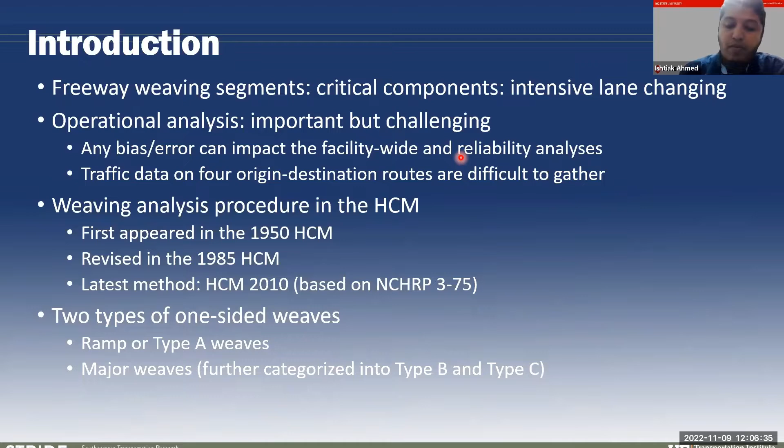A bit more background: this project was mainly motivated by some limitations that came to light recently about the HCM weaving segment analysis method. The HCM method for estimating speed and capacity of weaving segments depends on several steps, and each step has different models, like separate models for lane change prediction and separate models for weaving and non-weaving speed. Different and separate models mean more chances of uncertainty and modeling error, so the process was overall a bit complex.

Recently, it was found that the HCM estimated speed is not sensitive enough to different critical parameters, such as segment length, and there is also a tendency of overestimating the density. The HCM method often predicts the weaving segment speed to be higher than the non-weaving vehicle speed, which is counterintuitive since one would assume non-weaving speed would be higher because they're not involved with much lane-changing maneuvers compared to weaving vehicles. Also, when estimating capacity, the flow rate at capacity does not follow the fundamental traffic flow relationship of speed and density. So that is another issue.

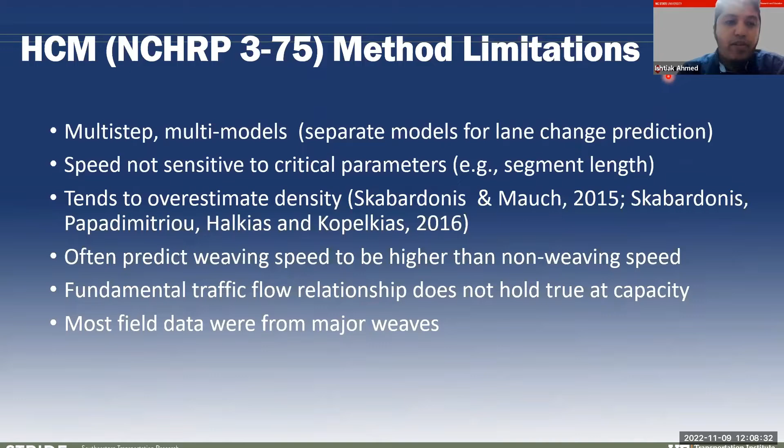These limitations motivated our team to lead phase 1 of this project. In phase 1, the team proposed a novel and simplified speed and capacity model for type A or ramp weaves only, so the main focus was on ramp weaves. It had some strengths and limitations. For example, the proposed method and models were simple and intuitive, and actually leveraged the fundamental traffic flow equation to estimate the capacity. The project collected data from 15 ramp weave sites.

There were enough variations of sites in that project, and the speed and capacity estimates were found to be sensitive to the critical parameters. When compared to the HCM model results, it was found for those sites that the model development RMSE was significantly lower for the proposed speed model compared to the HCM model. Although many of the sites were included in that NCHRP project, that was still a significant improvement that came out of this project.

However, the proposed speed model in phase 1 did not include any lane change configuration parameters. As I said, I'll talk about the different types of weaves later. Those are mostly classified based on how many lane changes the weaving vehicles would need to make to go from either ramp to the freeway or freeway to the ramp. Because of that, that model form was not applicable to the other types of weaves, such as the major type B and type C weaves.

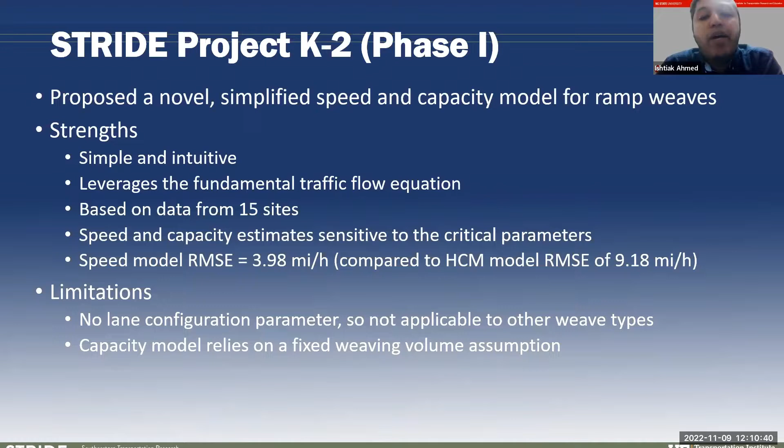The second limitation was that the capacity model proposed in phase 1 relied on a big assumption: that when we are observing or collecting the data, the observed weaving flow rates, the ramp to freeway and freeway to ramp flow rates, remain the same between the observed condition and the capacity condition.

Now, in phase 2, our main objectives are to eradicate those limitations we had in phase 1 of this project. To state the objectives, there are 3 main ones: to develop a speed model form that is applicable to all types of weaves, regardless of their lane change configuration type; to reassess and improve the capacity model proposed in phase 1; and to compare the model performance against the current HCM7 weaving segment model.

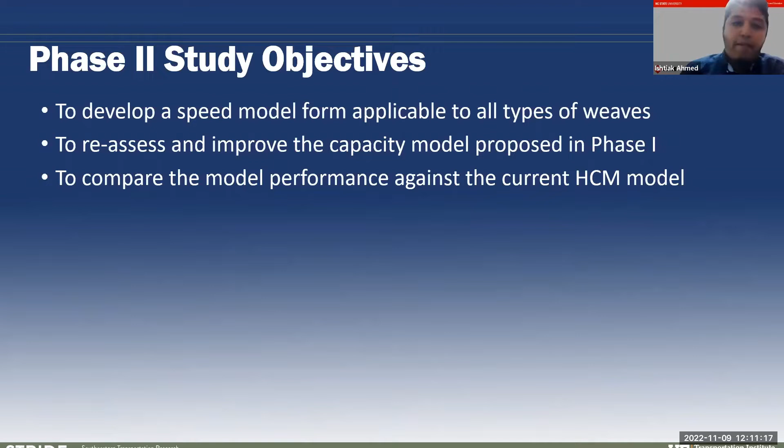So far, I discussed the 2 types of weaves, ramp weaves and major weaves, where the major weaves can be subcategorized into 2 further types, type B and type C. In total, we can say there are 3 types of weaves. In this figure, I'm explaining the main difference between these 3 types of weaves.

Let's say we have the weaving vehicle or weaving routes indicated by the diagonal arrows, and the non-weaving routes, which are freeway to freeway and ramp to ramp, shown by the horizontal arrows. The classification is mostly based on the lane change requirement of the diagonal arrows. So if any of the weaving routes, like ramp to freeway and freeway to ramp, have to make 1 lane change each, or that's the minimum number of lane changes required to make that maneuver, then we call that type A weaves.

So phase 1 was only about that type of weaving segment. Depending on the minimum lane change requirement, we can have 2 other types, type B and type C. If the minimum lane change requirement for any of the 2 weaving maneuvers is 0 or 1, then we call that type B. If it is higher for any of the maneuvers, then we call that type C weaves.

So in this project, we tried to incorporate these lane change parameters into the speed model and capacity model, to make the model form applicable to all three types of weaves that you are seeing here.

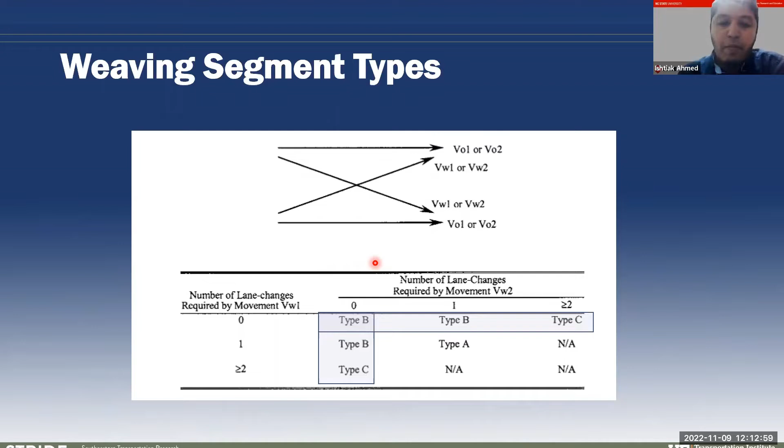Let's talk about those lane change parameters and see some sketches of what they look like. These lane change parameters are important because the turbulence we see in weaving segments is created mostly by the lane changing activities. Many times we see that the mandatory lane change, called in the HCM the minimum lane change required by weaving vehicles, is the predominant type of lane change in a weaving segment, listed as LC sub RF, where RF stands for ramp to freeway, and LC sub FR, where FR stands for freeway to ramp.

In addition to these two, HCM also uses another parameter called N sub WL, which stands for number of lanes from which a weaving maneuver can be completed with less than or equal to one lane change. If you think of lane changing as a load on traffic operation and on the driving task, LCRF and LCFR—higher these numbers, the more that load is. And if you think of it as having more options, that represents comfort in driving maneuvers. N sub WL represents that, and the higher that number, the more options drivers have and the fewer lane changes they require.

In this project, in the proposed speed and capacity model, for the phase one model, we did not need to use these parameters. The reason is that for ramp weaves, those numbers are fixed: one lane change is required for ramp to freeway, and one lane change is required for freeway to ramp vehicles. Now that we are trying to make those models applicable to other types of weaves, these parameters are becoming more important. In addition, we are distinguishing the parameter N sub WL, currently used in HCM, between N sub W for ramp to freeway and N sub W for freeway to ramp, to reflect the difference in difficulty or comfort of lane changing maneuvers between these two vehicle types.

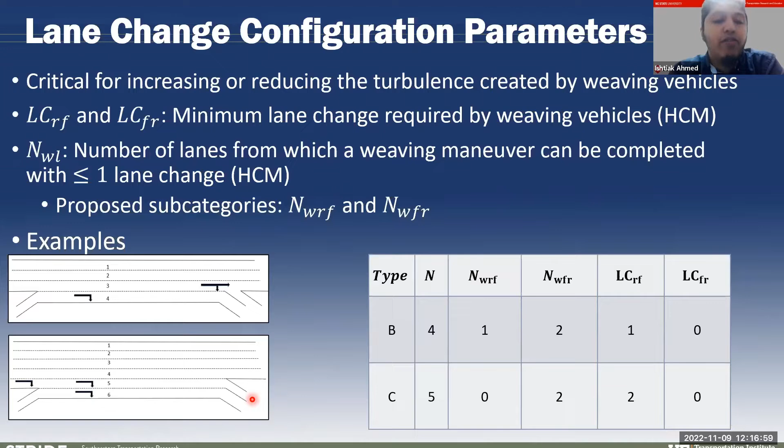For this reason, these two parameters are really important to reflect the difficulties and the ease for ramp to freeway and freeway to ramp vehicles to complete the weaving maneuvers. That should also be reflected in the estimated speed, because the speed model takes into account the total flow rate and the load imposed by the ramp to freeway and freeway to ramp vehicles on traffic operations. We'll talk about that in the next slide.

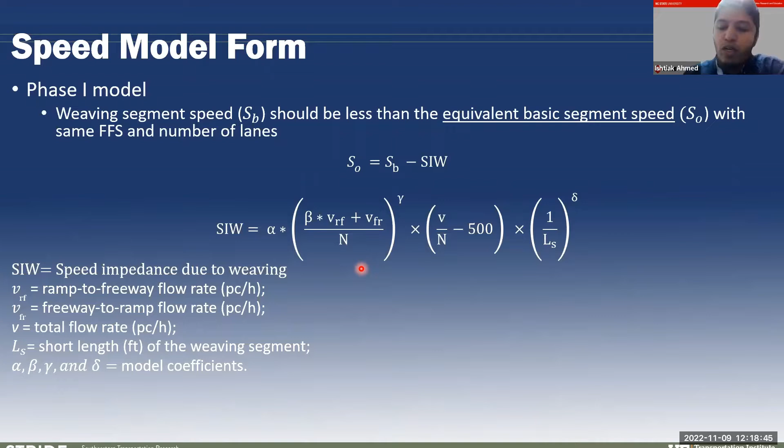We used this basic model form in phase 2 when we tried to develop a universal model, or a model for all kinds of weaving segments.

We introduced these lane change parameters to reflect the weight or the load imposed by the ramp-to-freeway and freeway-to-ramp vehicles using this equation. We kept the basic model form the same.

You can see we still have the total lane change, total number of lanes, the flow rate, and the segment length. But because of these changes, we need to recalibrate or re-estimate the coefficient values using data from both major and ramp weaves, like all three types of weave.

A, B, and C, to estimate these coefficient values. Now, what is the difference between the previous model and this one? This one accounts for the potential influence of lane configuration parameters. The example I showed you, through shared and exclusive exit lanes, can now capture the effect of those different lane configuration parameters, which makes this model form applicable to all types of weaves.

So that's all about the speed model. Before I show you the results on the speed model, let's talk about what was the issue with the capacity model.

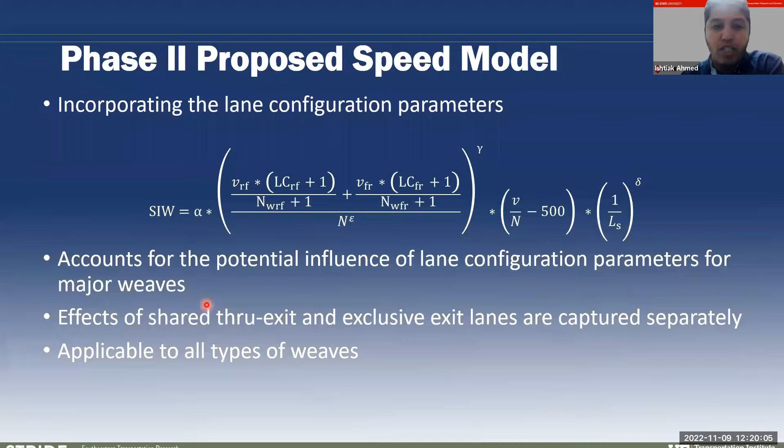In phase 1, the way we estimated capacity was: we have the basic speed model, but instead of the current observed flow rate, if we think about the flow rate at capacity, that speed model becomes a quadratic function of capacity, because the basic segment speed model is a quadratic function of the flow rate.

Now at capacity, you have the capacity flow rate as the flow rate, and the SIW equation is only a function of the capacity. So in this equation, we have this unknown C sub W, which is the capacity that we want to estimate.

Based on the traffic flow fundamental equation, we can say that the speed at capacity can be written as the ratio of the flow rate and the density at capacity. So in the bottom equation, we actually have two unknowns. The other unknown here is this density at capacity.

HCM suggests that the density at capacity is 43 passenger cars per mile per lane. If we take that as ground truth, we actually have only one unknown, which is the capacity. Once we plug in the coefficient values, this equation can be reduced to a quadratic equation like this, and the only unknown here is the capacity - it's analytically solvable.

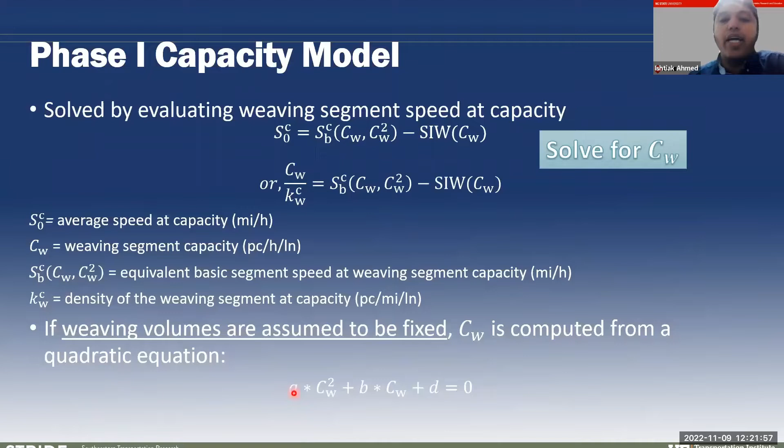In this project, we tested an alternative, more realistic assumption, which is that it's not the weaving volume that remains the same, rather it's the weaving ratio that remains the same between the observed condition and the condition at capacity. So what is that weaving ratio? It's the ratio of the weaving flow rate to the total flow rate.

We are assuming that we should multiply those flow rates by a factor, the same factor or ratio between the capacity and the observed flow rate. Let's assume that multiplying factor is mu. So the observed flow rate should be multiplied by mu to estimate the weaving flow rates at capacity, as shown by this equation.

That reduces the problem down to: instead of estimating capacity, we need to estimate mu, the multiplying factor, because it gets multiplied to both the observed total flow rate and the observed weaving flow rates. If we consider that, the speed at capacity equation now becomes a function of mu and mu squared for the basic segment speed.

And in the SIW, it now becomes a function of an expansion of mu to the power gamma, because gamma was used as an exponent. Of course, that's a more realistic assumption, but it makes the problem not solvable analytically. This equation can still be solved through an iterative method, and we tried both methods and tested both assumptions.

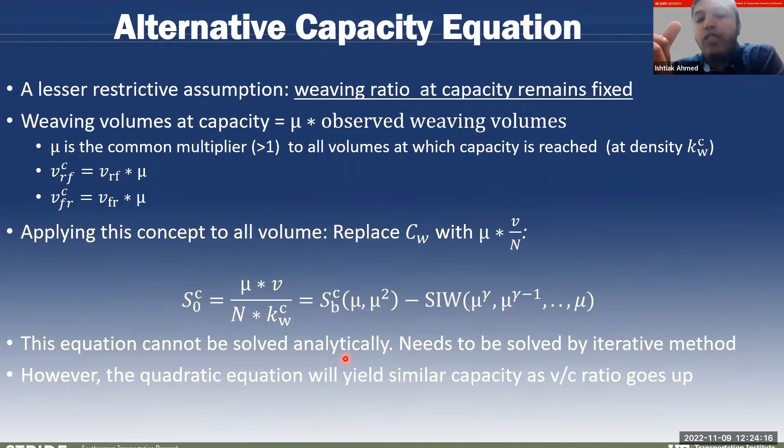We'll see results from both. Now let's talk about the unknown, or the HCM prescribed value of 43 passenger cars per mile per lane, because that's another change we made in the capacity model. In phase one, we took that as the recommended value, but when we looked at field data from NCHRP 07-2016, who are currently developing improved models for HCM on-ramp, diverge, merge, and weaving segments, they gave us data showing the actual field value of density at capacity.

Surprisingly, in all these cases, those values are actually much lower than 43 passenger cars per mile per lane. Particularly for the weaving segments - CD weave and complex weave - those are close to 35, sometimes even lower. These observations suggested we should reconsider this critical density value, and at the end we decided that 35 passenger cars per mile per lane is more realistic and matches more closely with field observations.

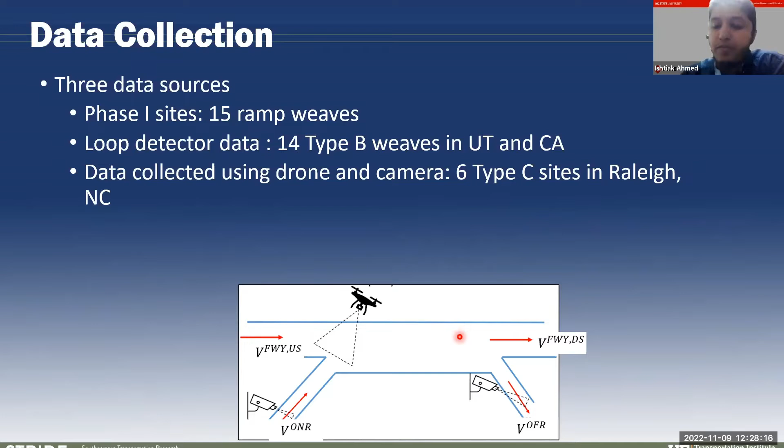As you can see, these data points are a representation of mixed state and inconsistent data. So we used a previously established method for removing that data to clean up and have steady state traffic observations. At the end, this is our final data distribution, aggregated in 5-minute intervals.

From ramp weaves, we have more than 11,000 data points. From type B weaves, we have more than 19,000 data points. And for type C weaves, because of the limitation of drone flight time, we didn't have as many data points as the other types, so it was 106 data points.

So as you can see, type B and C compose the major weave types, and we have a much higher representation of type B weaves. This is also attributed to the fact that type C weaves are mostly seen at system interchanges, so those are not as common as type B and type A weaves.

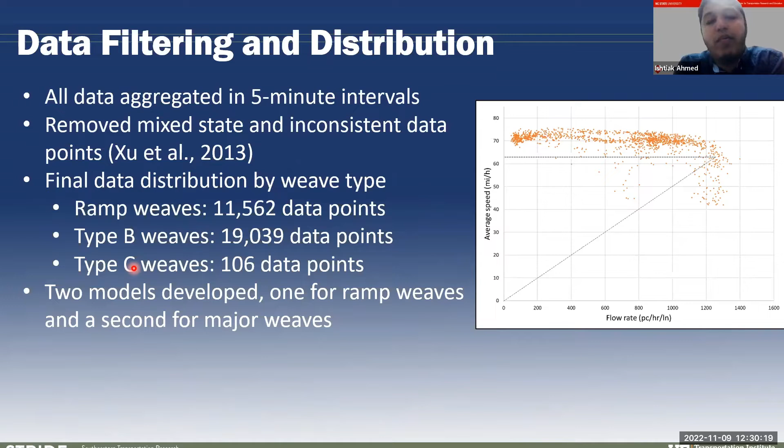At the end, we developed two models using the same model form, one for type A and one for type B plus C weaves, to account for some unobserved variation between the ramp and major weaves. For this slide and the remaining ones, I'd like to hand over the presentation to Ehsan. Ehsan, you can start.

Hello everyone, it's Ehsan Amini, and I'm a postdoc researcher at University of Florida. I had the chance to work on this project with Dr. Lily, Dr. Nagi, and Dr. Ishtiak.

So to calibrate the model, we separated the database into two parts, 15% and 85% each, and we randomly did that split.

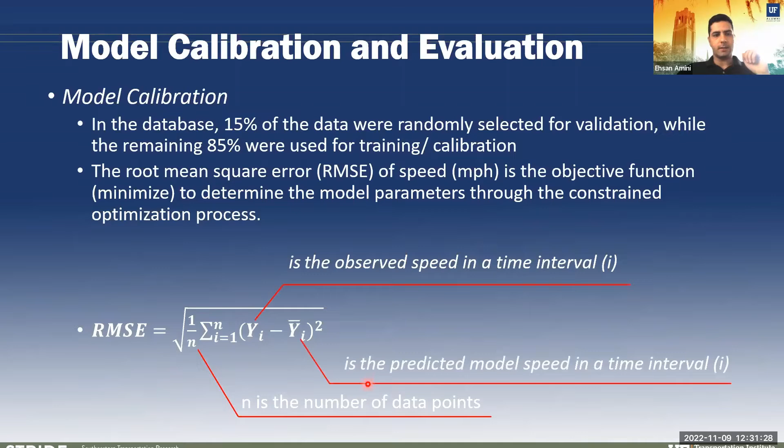We tried to minimize the value of RMSE, root mean square error, between the observed speed and predicted speed. The formula for RMSE is here, where N is the number of data points we have, Y is the observed speed, and Y bar is the predicted speed that our model will predict.

After that, we tried to minimize the value of RMSE and estimate these coefficient values: alpha, beta, gamma, and delta. We set some constraints on these coefficients, such that this coefficient should be between 0.2 and 20. We ended up getting these values by trial and error during calibration, trying to keep the coefficient in a reasonable range so we don't increase the RMSE in model prediction.

As you can see here, the value of RMSE for the ramp weave was 2.63, and for the major weave it was 3.4. Can we go to the next slide?

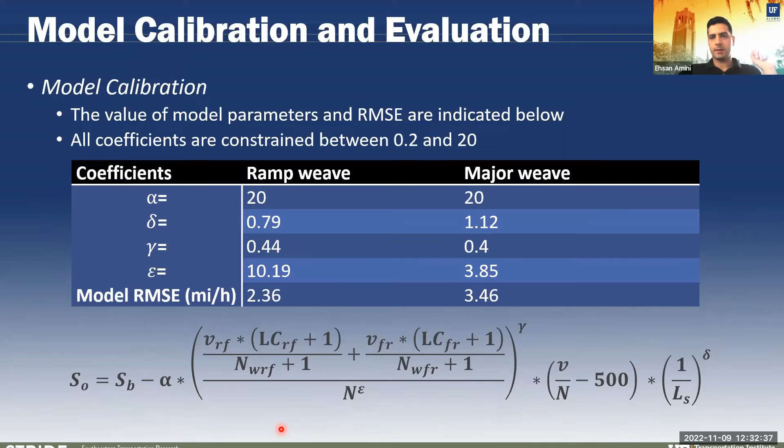We also calculated the RMSE based on the evaluation data set, which you can see in these values here. These values for the calibration data set and evaluation data set were pretty close to each other, meaning our model didn't overfit on the calibration data set. This proves that our model can predict speed in a good way.

Let's go to the next slide. Here we plotted two graphs: the left one is for type A, the right one is for type B and C. We have predicted speed on the vertical axis versus observed speed on the horizontal axis. You can see for both graphs, the predicted speed is pretty similar to the observed speed in the field.

But in type B and C, we observed a regime where our model predicted speed higher than what we had in the field, mostly when the observed speed was between 40 and 50. We found no geometrical reason for this observation. Our guess is that these data points are related to oversaturated conditions, and we couldn't remove that during data cleaning. If we can go to the next slide.

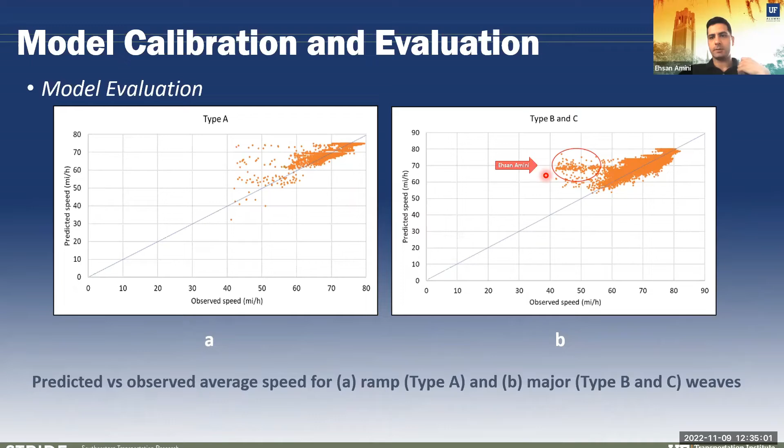If you go to the next slide, we did some sensitivity analysis on the capacity model. Here we have capacity versus length of section. We kept all the parameters in the model consistent and just changed the length of the weaving section. As you see, HCM has a very linear relationship between length and capacity of the weaving section, while the capacity our model predicted is more sensitive at the very beginning of the section. So for a short weaving section, increasing the length will increase the capacity more than when we have a long weaving section.

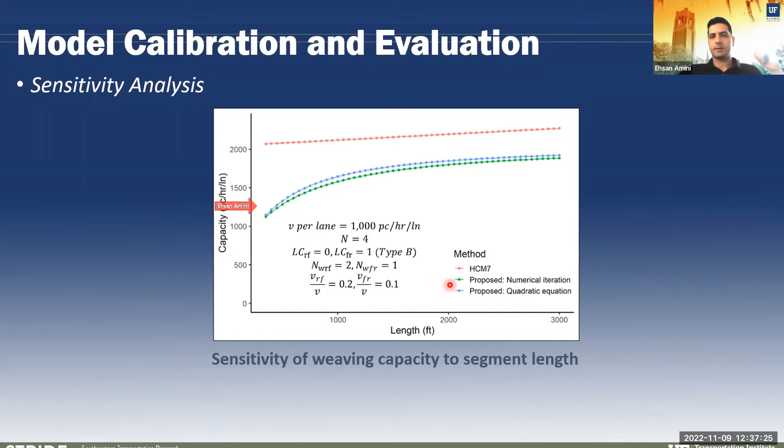So here we have capacity versus weaving ratio. Both HCM and our proposed model have the same relationship between these two, but again, the predicted capacity for our model is less than what HCM is calculating.

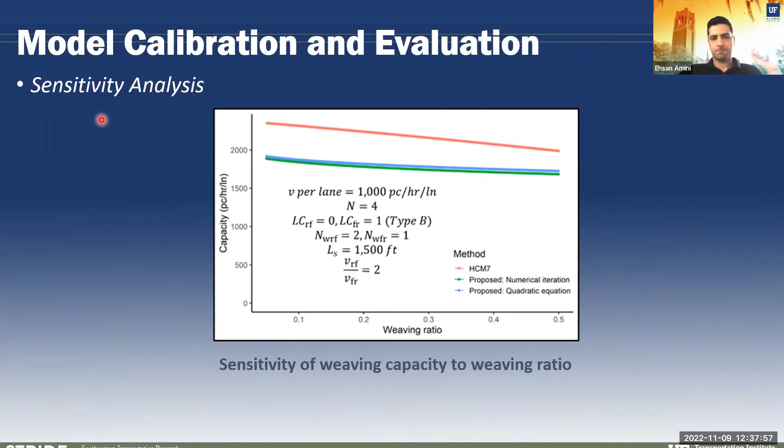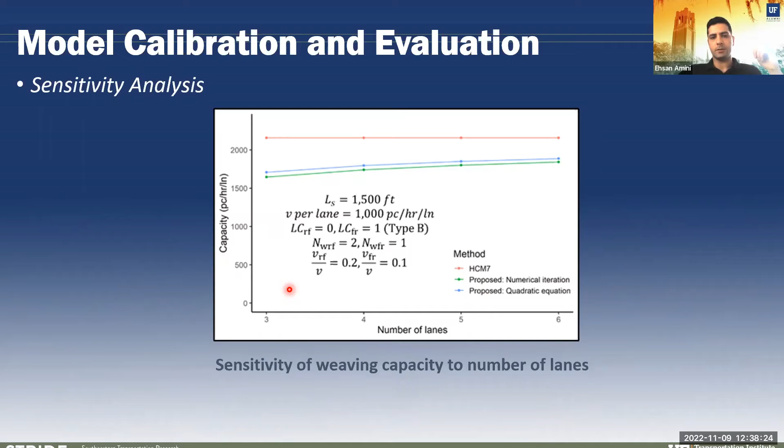Here we have capacity versus number of lanes in the weaving sections. The red line at the top is the HCM prediction, and you can see HCM has no sensitivity to number of lanes in the weaving area. But in our model, by increasing the number of lanes, the capacity of the weaving section will increase too.

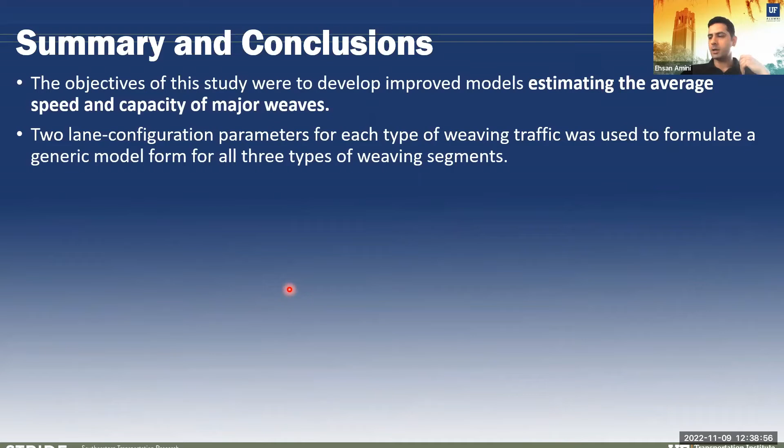So here we have a summary and conclusion about this presentation. At the very beginning, the objective of this project was to estimate the average speed and capacity in the weaving area. We used two different parameters to capture all geometric features of the weaving area: the minimum number of lane changes required for the ramp-to-freeway and freeway-to-ramp movements, and the number of lanes from which a weaving section can be completed with one or zero lane changes.

The model that we recommended uses the equivalent basic freeway segment, and we just try to capture the effect of turbulence that happens because of the weaving area.

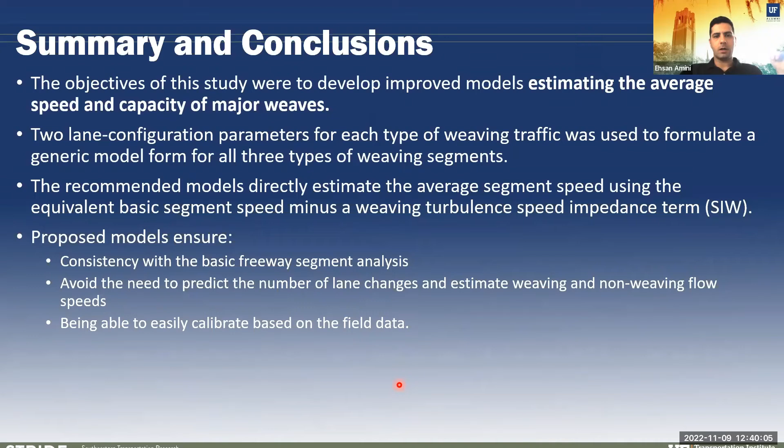In the modeling, we ensured that the models are consistent with the basic freeway segment, and we don't need to calculate the number of lane changes and estimate the weaving and non-weaving flow speeds, which based on HCM we should do. These models are pretty easy to calibrate based on field data, and we found that the model can be fitted very well on the dataset.

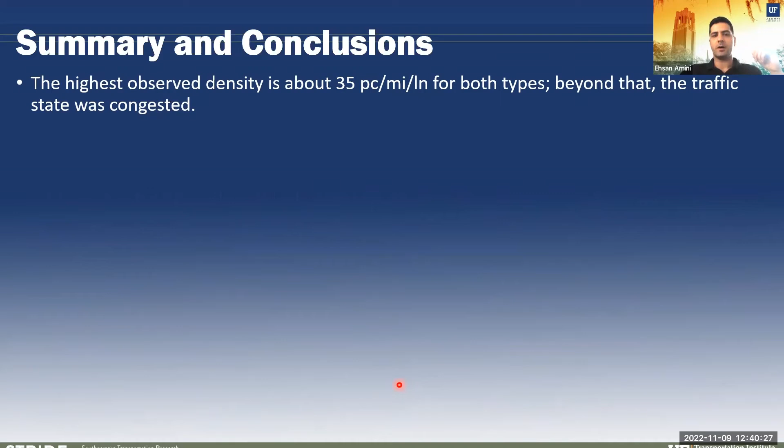As Ishtiak mentioned, the highest observed density at capacity that we observed was 35 passenger cars per mile per lane, and beyond that we had congested condition.

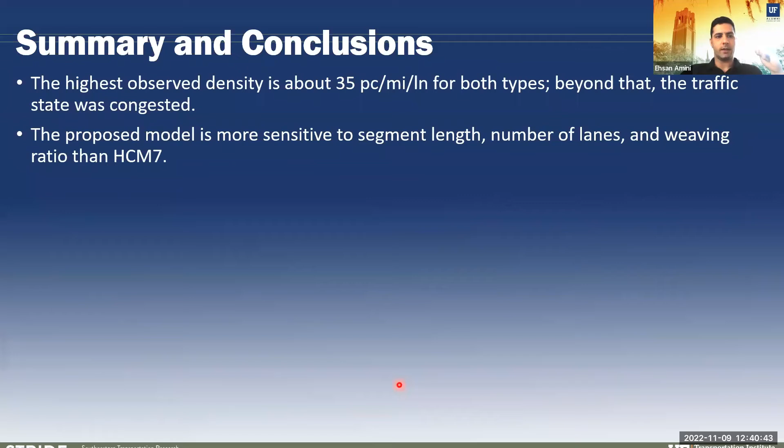The proposed model was more sensitive to length of weaving section, number of lanes, and weaving ratio than HCM. The NCHRP 726 project used the same model form and tried to recalibrate it. I think Dr. Nagy can help provide more information on that project, if you want to jump in, Dr. Nagy.

Can you hear me? Yes, thank you Ehsan. I did want to make the point that our project, the STRIDE project, was going on in parallel with 726, although our project was a little behind in terms of data collection. So what has happened is, and I think that's a good example of collaboration between a national research project, NCHRP 726, and the STRIDE project, is we're trying to combine both datasets and improve even more, making the model more generic for a larger number of sites. That work is ongoing. We are sharing the data, and one consistent thing, as Ehsan said, is that the model form has not changed. So the only thing we're doing, or will be doing, is recalibrating the model based on a much larger dataset that would hopefully give us a little more confidence in the values.

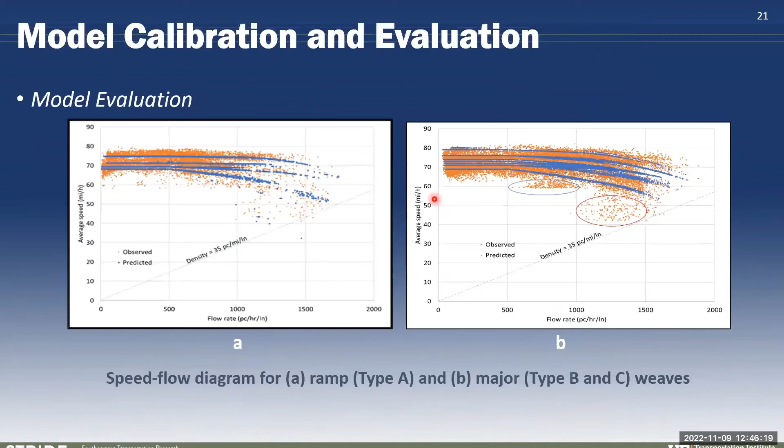It's also very consistent with what Ishtiak mentioned, that the HCM tends to overestimate density, which means it's underestimating the speeds. These are the types of error we're seeing, which we feel anything below 5 miles per hour is a reasonable estimation for a macroscopic model.

And the other thing I want to mention has to do with the fact that our motivation for the configuration parameters partly came out of an evaluation of the model forms in 726. They actually did a little workshop with folks from different DOTs to evaluate the model. It was well received, but there were some issues about including additional configuration parameters, and that's what the model does.

And finally, one thing that was only mentioned in passing: how do you get weaving and non-weaving flows with sensor data? The research here actually developed and validated a method so that with only volume data on the ramps and the main line, you can estimate those weaving volumes with a reasonable degree of accuracy.

I'd also like to add that because of time limitations, we couldn't present the results on the proportional weaving assumption method that I mentioned, but we have that in the report. If you want to know more about that method, which only requires the entry and exit flow rates on the freeway, on-ramp, and off-ramp, we'd be happy to help you and demonstrate how that method is working. It's working great.

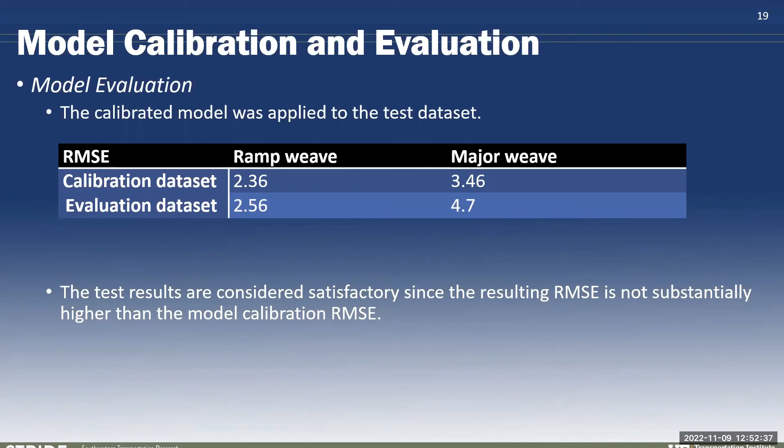Yeah, that's a tough question. I mean, and I'll also let Lily maybe chime in if she can. The reality is basic freeway segments honestly never break down on their own. Typically, what causes a problem on a basic freeway segment is usually some kind of on-ramp or off-ramp. If you have looked at, and Ishtiak, maybe you want to go back to that slide from 726, because that's not just weaving, by the way.

Lily, do you want to add anything? I don't think Lily was able to make the meeting today. Oh, okay, I'm sorry, I was not aware. Okay.

About that, I'd like to add one thing, is that I think it's a question for the committee members who are involved in the HCM 2010, because that's a question for them as well, since weaving segment K sub C, or the density at capacity, was 43, but for the facility-wide or oversaturated method, it was 45 for all types. So why was there still a discrepancy of 2 passenger car per mile per lane, and how did they address that issue at that time? So I think that's a question for them as well.